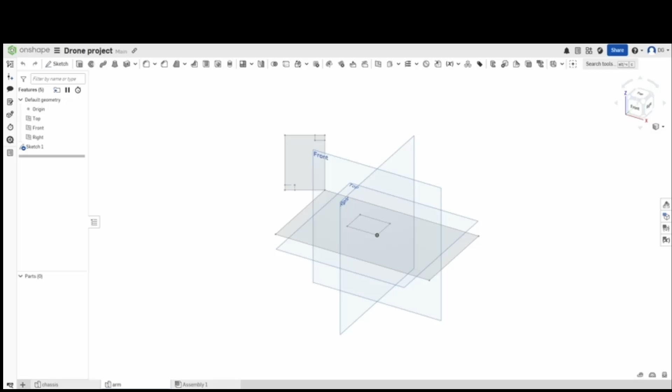Okay, so this is sketch part 2. This is just to make everything easier. Just delete this. This is just to make everything easier and make all the things just a little easier for you guys.

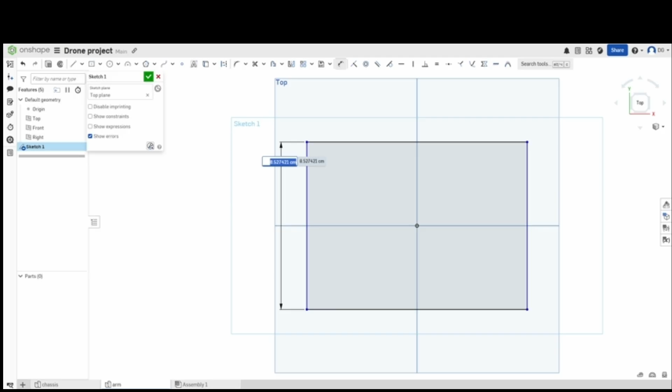And tips: so D, obviously dimensions, we want to set that. Two touching lines, 90 degrees, or the degrees we want.

And Q. So if we have a shape and we want to know this dimension, but we don't want to draw a rectangle up here and make a complete square. Like what we're gonna do is freehand it all the way down here and just guess that this length here is the one we want.

No, you can either just make a line and delete it, or you can press Q, which is a construction line. Construction lines don't become full things when they're completed. When all sides touch, they don't become a full shape.

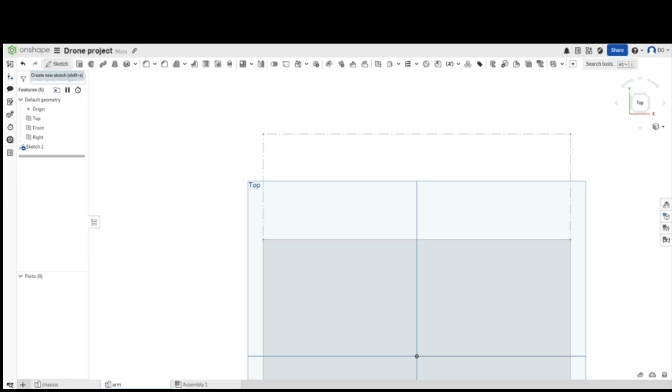This could be something that messes you up. You might have turned it onto Q and then done your whole thing, then realized, oh, it's on Q, I can't extrude it. See here, you can't extrude this. But you can do this side, because it's a full shape.

So this side again, D. Okay, so you saw earlier, if you don't want to have to measure out every single thing to get a perfect square, you can just let your mouse lock in place once you go off a point.

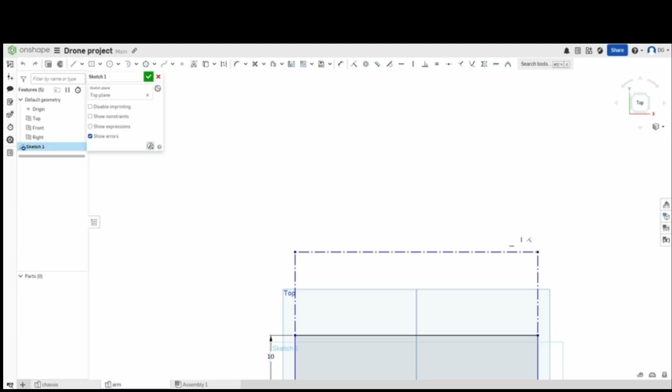So there's points on the thing. See how there's points here? They're all on the point, like a right angle, like the end point of a line, connecting lines.

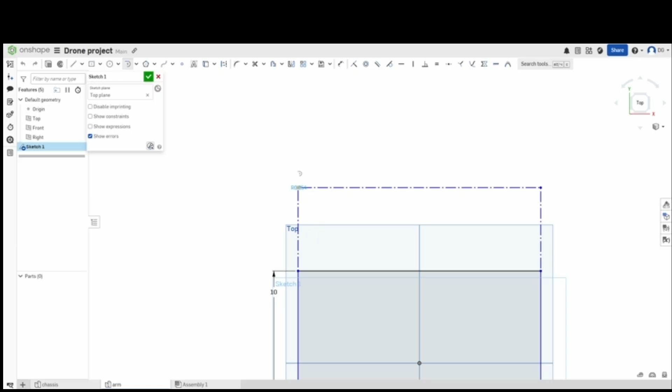And if we go off a point, there's a little buffer around the point. So if I zoom in, I can't do it there if I'm out here. It'll automatically snap to the point, even if I'm not perfect on it, which is pretty good, unless you zoom in, then you can get it accurate if you want it off the point.

But you see how my mouse kind of gets stuck along this line? Like this little, it's not like over here where I have free movement, it gets stuck. That's the right angle. This is always going to be a right angle with this line. That means it's straight, and that means you don't have to go in and do all the angles after to make sure it's 90 degrees.

Because that's a huge problem. You need all your dimensions to be perfect, or else it'll compound problems over a long time, and it'll just basically die. Like your fillets won't work, or your extrusions will just be a mess.

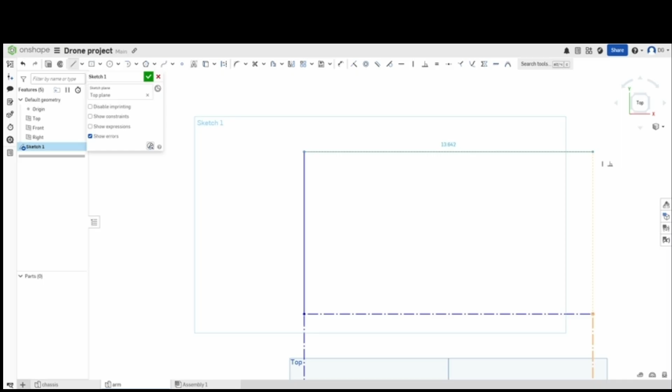And then you see here again, I don't have to measure out or dimension this line here, because I know it's in line with this one, because I went from here, point to here, I was 90 degrees.

See how there's like a yellow dotted line over it? And we can go on forever, but if we want it in line with this one, we don't have to just guess and then do the dimensions of this one to get them equal. We can actually just hover over the line.

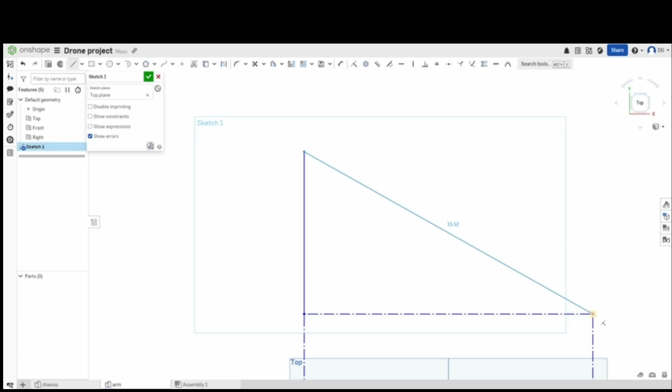If you hover over the line and then just slowly go up until both lines show, you have 2 yellow dot lines. That's perfect. They're both 90 degrees. These are both equal.

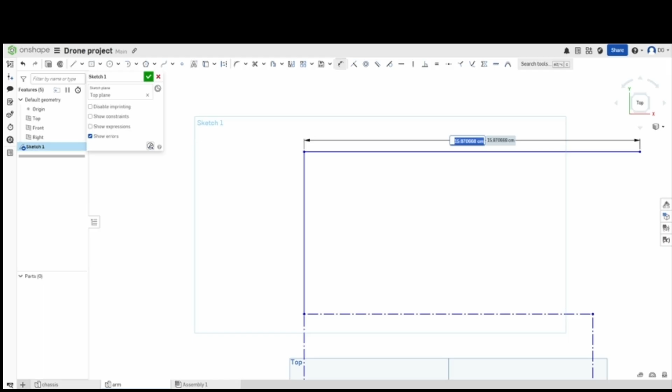Done. We didn't have to go sit there doing this. You didn't have to sit there and go, oh yeah, that's that, and let's do 13.6, blah blah blah. We didn't have to go sit there doing all that, I don't know why I did, so I didn't have to do that, and that just makes it a lot easier.

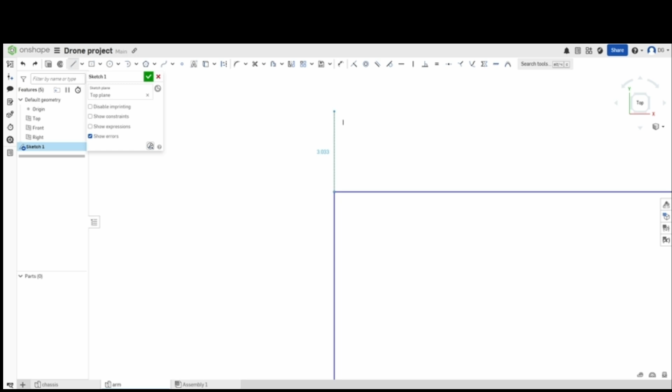If we want to make a curve off a line, which I don't think we need here, you just go over the same point again. If you go over the dot that you selected, you can actually make a curve. See there, I just went over it as a line again, then went back over it as a curve, if you want that. I don't know why you would want that in this one.